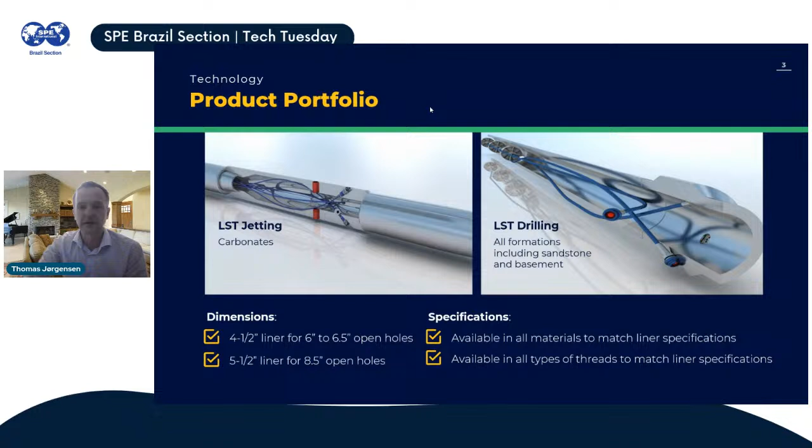So I will run an animation now on the jetting technology to go more into detail on that. I don't think there's time to also do a drilling animation that's available online, but the end result is very much the same with laterals extending out from the subs. So then moving to the jetting animation, I'll get this going.

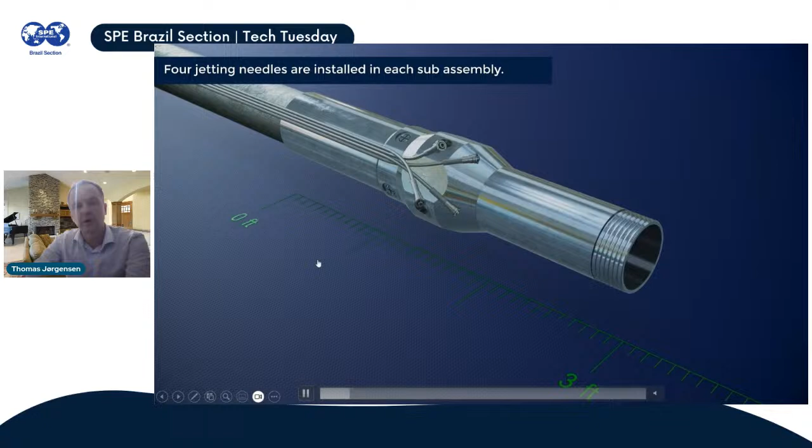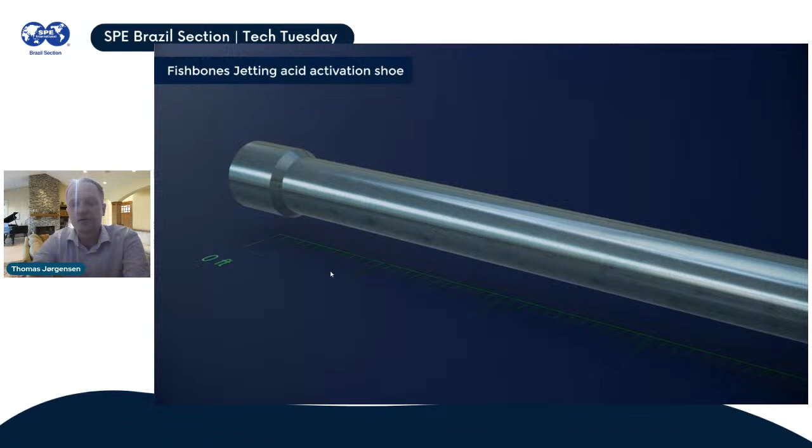This shows the sub, which is about 1 meter long, and is made up to a full-length liner joint in a workshop. Then 4 needles are installed into this assembly. Then there's an open hole anchor that will go with the string to anchor the liner in place. And there's an activation shoe that's required. This enables circulation as we run in hole, and it's closed when we start pumping acid.

So this liner is run into the hole. Multiple stimulation subs can be run depending on the length of the open hole. There's an open hole anchor being run, and then there are additional subs coming. The liner is then run to TD. The liner hanger is set. The top hanger is set.

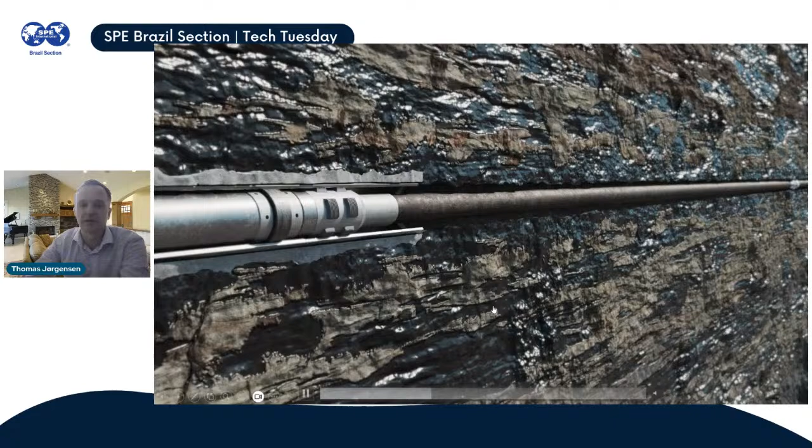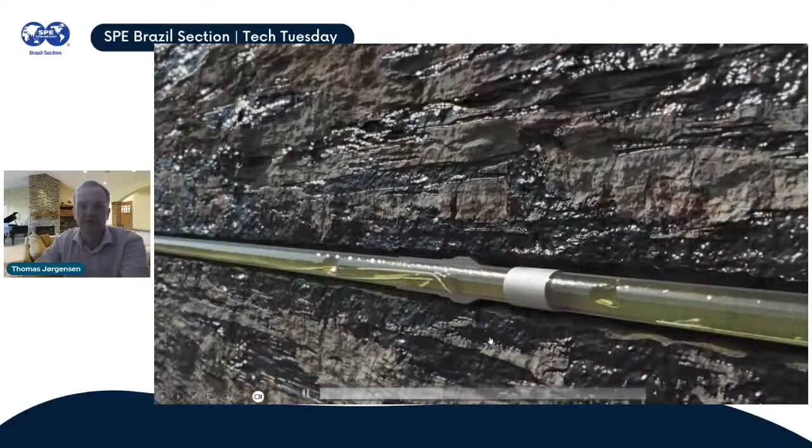And we start pumping acid into the liner. Now the shoe is open, so it's possible to get the acid all the way down to the shoe, and the shoe will close upon contact with acid. There are flapper valves that will close. And now we have a closed system, and sorry, I just have to get this in the right order. Now we have a closed system and can continue to pressure up.

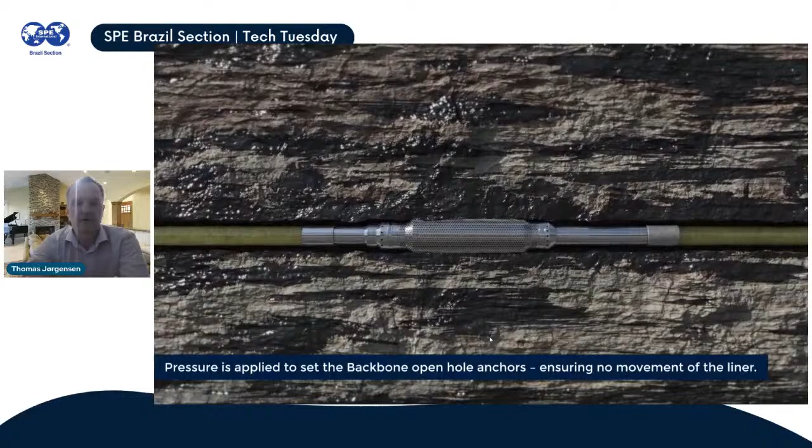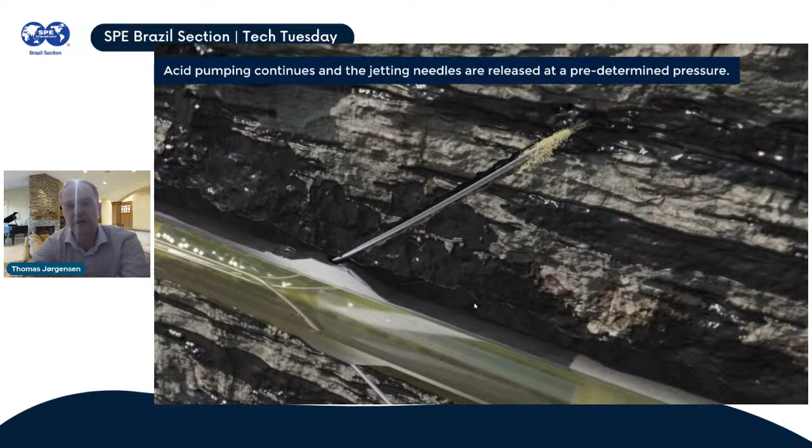The open hole anchors will expand and anchor the liner, and the needles will activate. So now the needles are activated in a process of dissolution of the carbonate formation and erosion of the formation. So basically the needles make their own hole as they progress forward, up to 10 meters away from the wellbore. All the needles activate simultaneously. This is a typical operation that takes 3 to 5 hours to complete the extension of the needles.

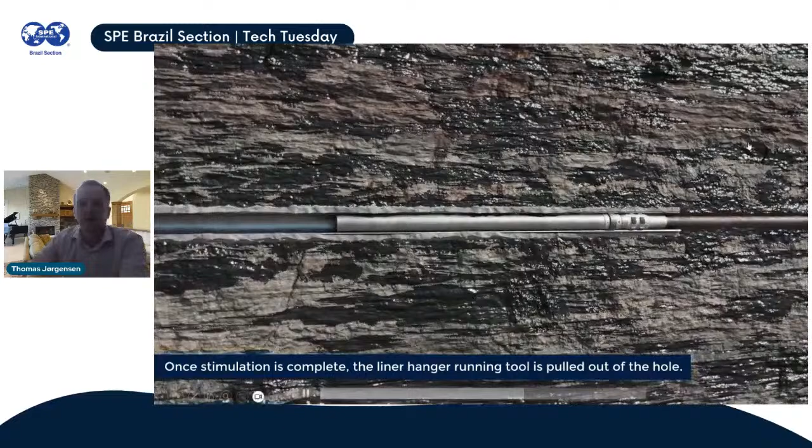After the needles have been extended, the running tool is pulled out of the hole. Then an optional tool can be run. It's a junk basket with a cutter head to cut and remove any remaining needle tails from the liner ID. This is to make it possible to do an intervention or run PLT later. So this tool cuts and collects the remaining needle tails, bringing them back to surface.

An alternative method is to run a flat bottom mill and just push all the remaining needle tails to the bottom, which can be a bit more effective way of doing this operation. Then the well is put in production. The hydrocarbons will flow in the annulus between the needles and the formation. The jetting creates a hole that is larger than the needle itself, so there's room for fluids to flow down into the main bore and then through production valves in the subs.

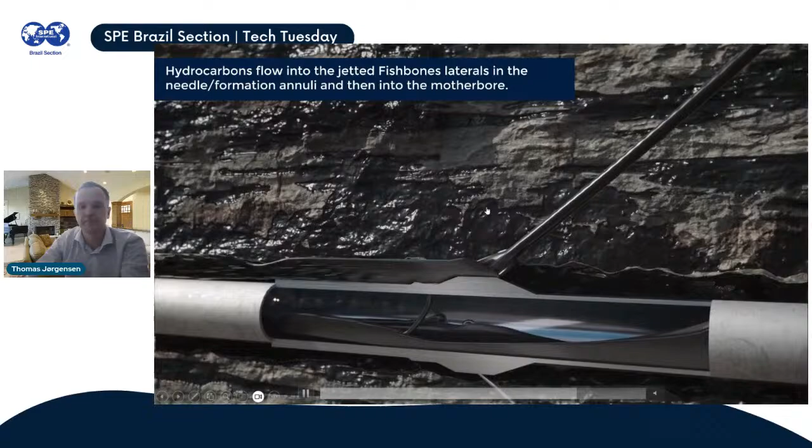So this technology makes it possible to connect layers, to connect to fractures, and to get that acid mechanically diverted and uniformly distributed between the needles, with the objective of increasing productivity or injectivity in case of water injectors.

This slide shows a couple of photos of the drilling technology. You can see the sub there to the right, made up to liner joints. The front sub shows a needle sticking out, and you can see the drill bit there in the front. This is a 1/2-inch drill bit sticking out there. This piece will be pushed down against the seal and secured in place before we run in hole. To the left, you can see the needles being assembled and pushed into the made-up subs and prepared. This is all done in a workshop, and then the ready assemblies are shipped to the rig site.

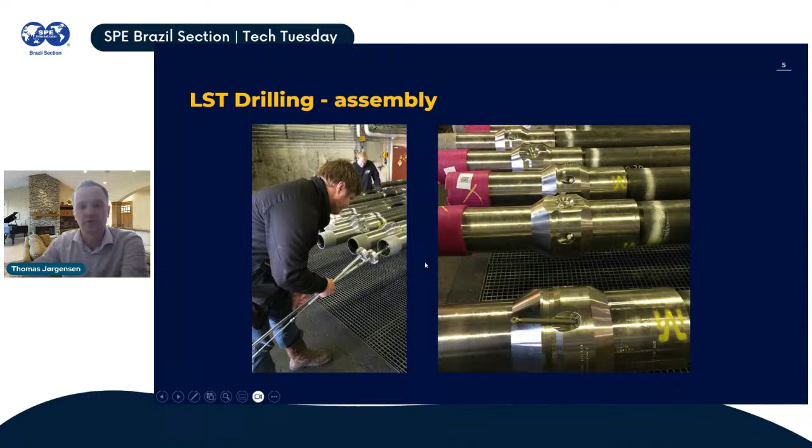So on the rig, the tools will look like this. To the left here on the pipe deck, you can see the stimulation subs wrapped up in protective material in white on the top there, and we have the full length liner joints and all the needles inside. In the picture to the right, you can see one of the subs going into the hole.

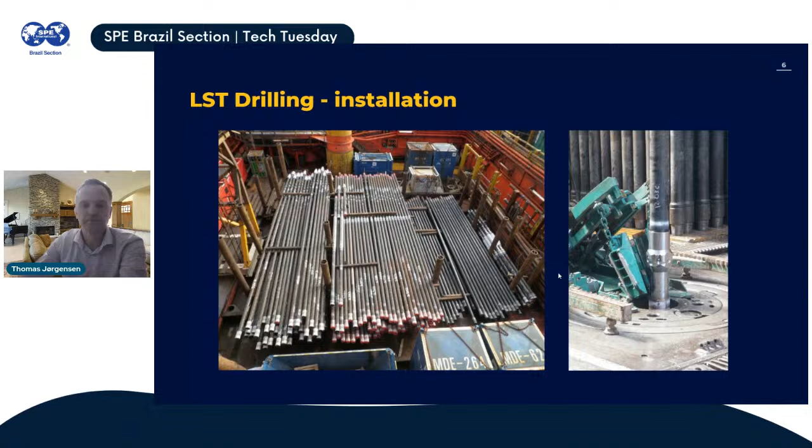It's also possible to combine the subs with standalone screens in case of need for sand control. This solution has been run in a number of wells in the North Sea, where instead of placing the sub on a blank joint, it's mounted onto a screen. In that case there are no production valves in the sub, but all the inflow will go to the screen, which has to have a non-perforated base pipe and an ICD with a check valve. So the inflow will be to the ICD, and the check valve is required to hold pressure as we are circulating to drill out the needles.

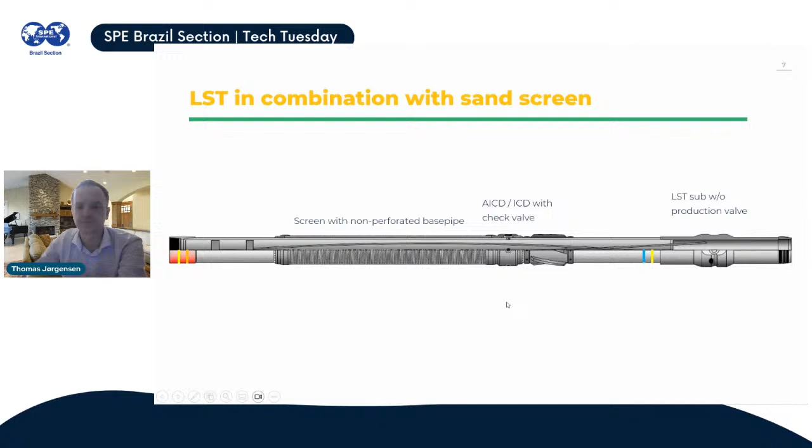This slide shows some core samples, some formation samples. We do testing up front on representative formation samples to make sure that the formation can be penetrated either with jetting or drilling, and the testing also gives good information on the time, the ROP basically, to extend the needles. From this testing done up front, we can calculate the volume of acid needed to extend the needles, or the time required to circulate to drill out the needles. To the left here, you can see a limestone formation that has been jetted, and you can see the hole there. To the right, there are some sandstone samples.

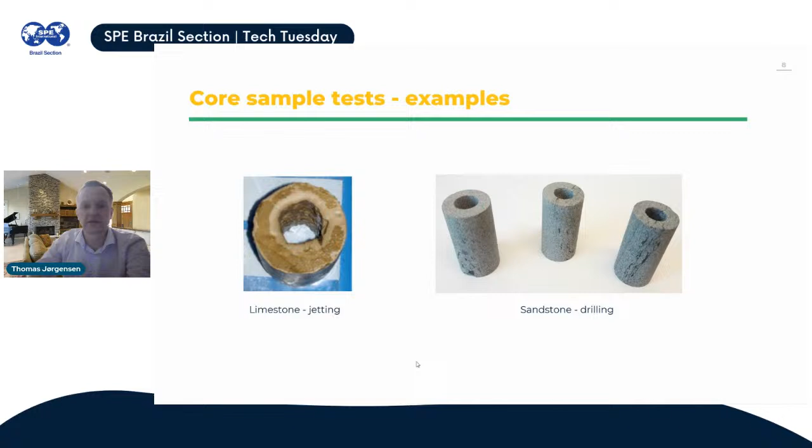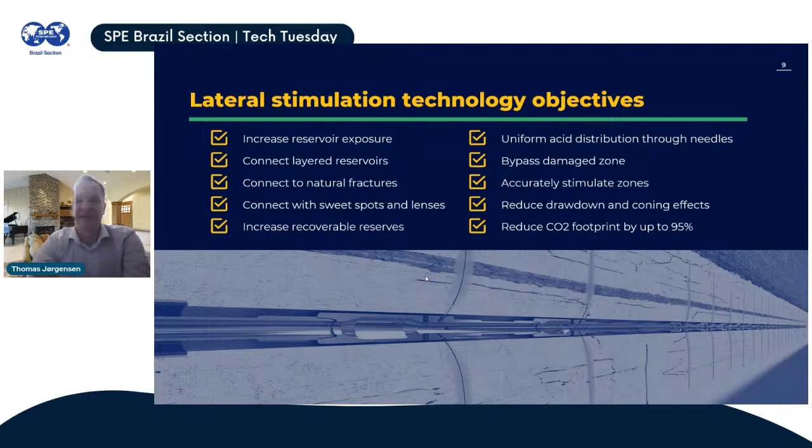These are some of the main objectives of deploying lateral stimulation technology. It's about creating more exposure to the reservoir, connecting layered formations, and connecting to natural fractures away from the wellbore. It's also possible to connect to any sweet spots and lenses that could have been missed during geosteering with this technology.

In terms of the jetting technology, the acid will be uniformly distributed between the needles, as there is a jet nozzle with a small, very restricted ID in the tip. So the acid will distribute between the needles, and you can be sure that the acid will be distributed into that formation 10 meters away. Given the length of the needles, this certainly bypasses the damage zone and provides an accurate type of stimulation. It's fully controlled - in case of a thin formation, it's possible to reduce the length of the needles to ensure they stay within the target formation.

Another benefit of lateral stimulation, or any type of stimulation, is that it's possible to produce the well with a lower drawdown, which results in less coning. I will show an example of that in one of the case histories coming up soon.

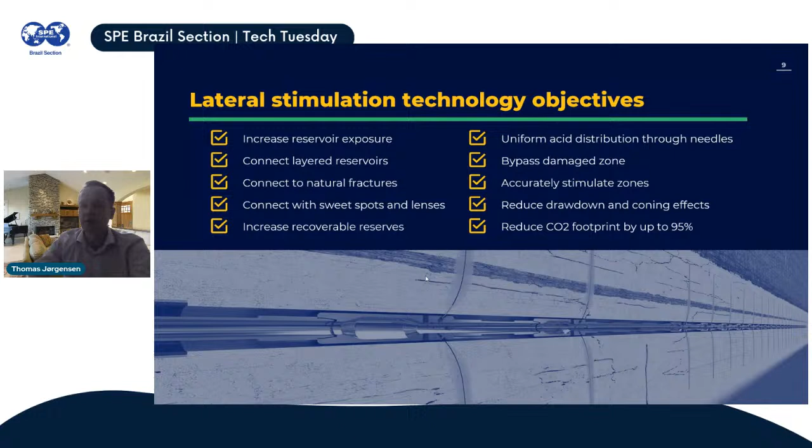It's also possible to reduce the CO2 footprint. A study was done by a third party in Norway a couple of years ago that looked at a standard North Sea well, like a 1,000-meter horizontal well, and calculated the CO2 emissions from hydraulic fracturing operations versus a lateral stimulation operation. That concluded it's possible to reduce CO2 emissions from the stimulation operation by 95% using the lateral stimulation technology. Main reasons for that are reduced rig time and the elimination of the stimulation vessel.

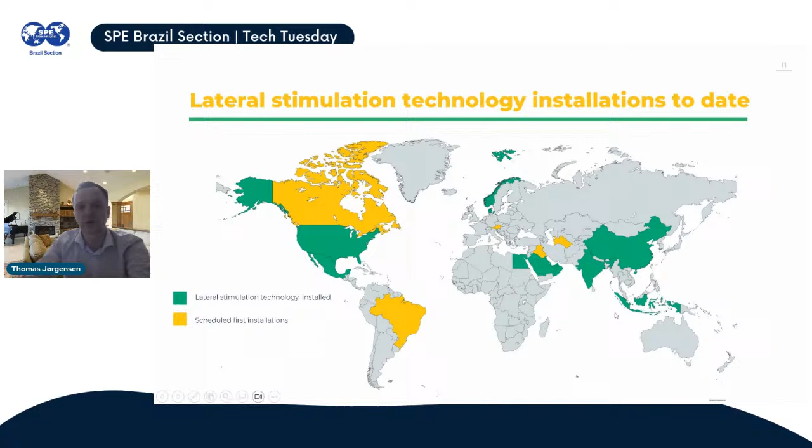Those carbonates, naturally fractured and layered carbonates, are very good candidates for this type of technology. Then you have India, with deployments in carbonates offshore, and China, with sandstone onshore and basement formation offshore, and also one deployment of the technology in Indonesia. There are some countries coming up - as Pierre mentioned, we are preparing for first deployment in Brazil, and a few other countries are colored in yellow with upcoming installations.

As mentioned in the beginning, this technology is applicable in a whole range of applications. This is a summary of what has been done to date: naturally fractured carbonates, layered carbonates, deployments in chalk formations with the drilling technology, deployments in layered sandstone and fractured basement, and also in conglomerate formation. There is also one deployment of the jetting technology in coal bed methane.

In terms of well types, it's really applicable in any kind of well. To date, there are deployments in oil and gas producers, water injectors, exploration, and appraisal wells. To the right, you can see a combination with other well construction technologies that has been performed to date.

As of today, there are 44 installations of this technology globally. Installation number 45 is ongoing, and it will be a busy year in 2024 for our operations team, with multiple installations in the planning. Both onshore and offshore wells, the split is almost 50-50.

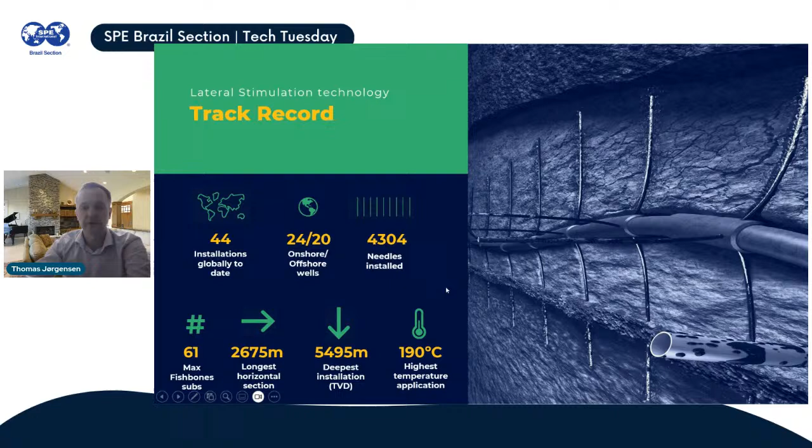In terms of biggest job, 61 subs, that's a deployment in the North Sea in a 2,600 meter horizontal wellbore. Deepest deployment, 5,500 meters, and that's also the warmest application, 190 degrees C. This does not represent the limits, but the actual installations so far.

Then I have selected a number of case histories to give an idea of various applications and the type of results that have been achieved with the lateral stimulation technology.

Starting with a typical Middle East carbonate application: low permeability limestone, less than 1 millidarcy horizontal permeability, with some denser layers with even lower permeabilities and quite poor vertical permeability. These wells are typically matrix stimulated on coil tubing. The operator wanted to test the lateral stimulation technology to see if better results could be achieved.

This specific installation took place in a new well with a 1,500 meter horizontal wellbore, 6-inch open hole. A 4.5-inch system was deployed with 40 jetting subs evenly spaced out, and since there are 4 needles per sub, 160 needles or laterals were made.

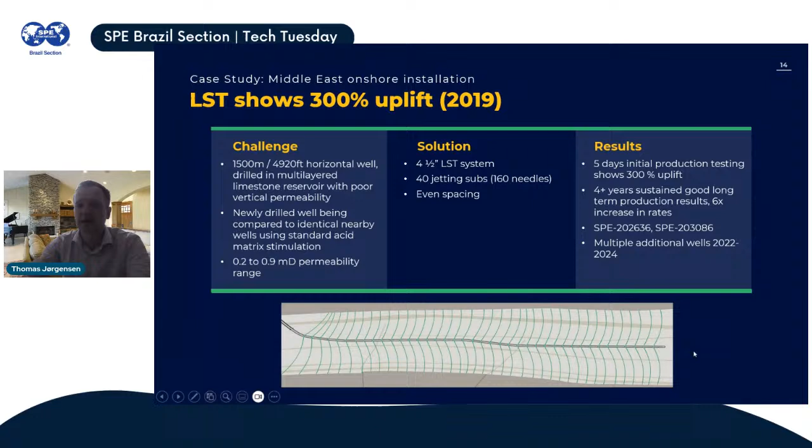In terms of results, the initial production testing showed a 300% uplift compared to offset wells, and the long-term production has been really good. There are 2 SPE papers written and published by the operator, and this slide is from one of the SPE paper presentations.

To the left in this image, you can see the 3 wells: the one in the middle with the lateral stimulation technology, and 2 offset wells that were matrix stimulated. In the chart to the left, there is a comparison between the lateral stimulation completed well, producing 1,600 barrels per day, and the 2 offset wells, which were at 500 or even less barrels per day. To the right, you can see the PI difference.

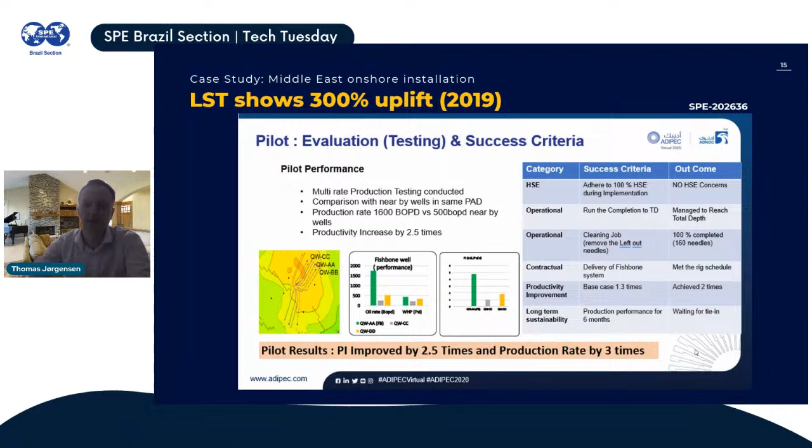Moving to another Middle East installation, this is offshore in a multi-layered naturally fractured limestone formation. This well was targeting 3 layers called D1, D3, and D4. Layer D1 has quite good properties, and no stimulation was performed there, while in the lower 2 layers stimulation was needed. The operator evaluated different stimulation methods and decided on the lateral stimulation technology.

The permeability in the lower 2 layers is quite low, like 0.2, 0.3 millidarcy. 20 jetting subs were deployed across the lower 2 layers, and the jetting operation was completed. The well was put on production at a much higher rate than expected.

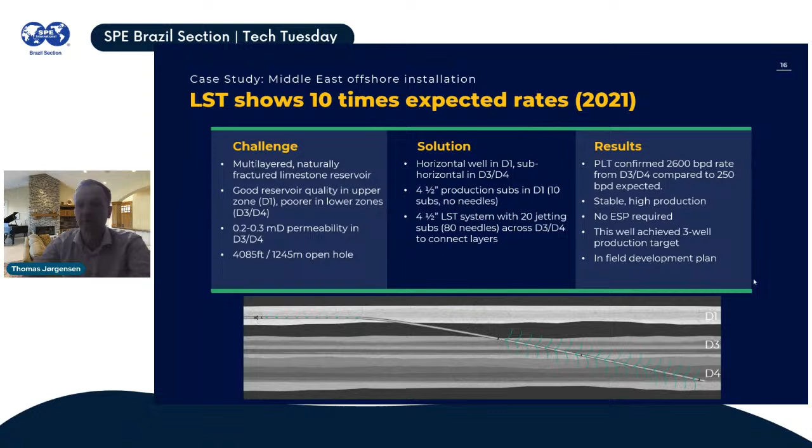So the operator decided to run a PLT to confirm where the production was coming from, and that PLT confirmed that the majority of the production was coming from the lower two sections, at a 10 times higher than expected rate. This well achieved a 3-well production plan, and no ESP was required as planned in this well. So a good installation of this technology offshore Middle East.

Another one from the Middle East, this is onshore, an example where lateral stimulation technology makes it possible to produce a well at a lower drawdown to avoid coning. This was an existing well that suffered from high GOR, since the operator had to produce the well at a very high drawdown given this very tight formation.

So stimulation was needed. Lateral stimulation technology was deployed. A 4.5-inch liner with 40 subs were run with 2 different needle lengths to avoid stimulating into the lower zone. The well was put on production with a 4.5 times increase in PI, which allowed the operator to reduce the drawdown and also reduce the GOR.

So the objectives of these installations were met.

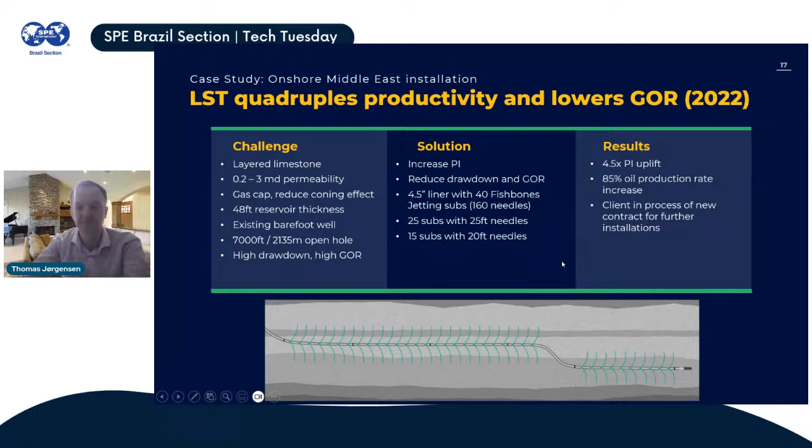Moving from the Middle East to Asia, this well is an appraisal well, the final appraisal well in this offshore limestone formation drilled in 2022. The previous appraisal wells were stimulated in a bullheading operation, matrix stimulation, and they didn't really achieve the results they were after. They were targeting 600 barrels per day from these appraisal wells.

So it was decided to run the lateral stimulation technology in the final appraisal well. A quite small system with only 6 subs were run across the target lower layers. The deployment was executed, the pumping was done, and the well was production tested. It started to flow more than 2,000 barrels per day, and sustained at 1,800 barrels per day during the production testing. So the production target was met, and the operator is proceeding with the field development plans.

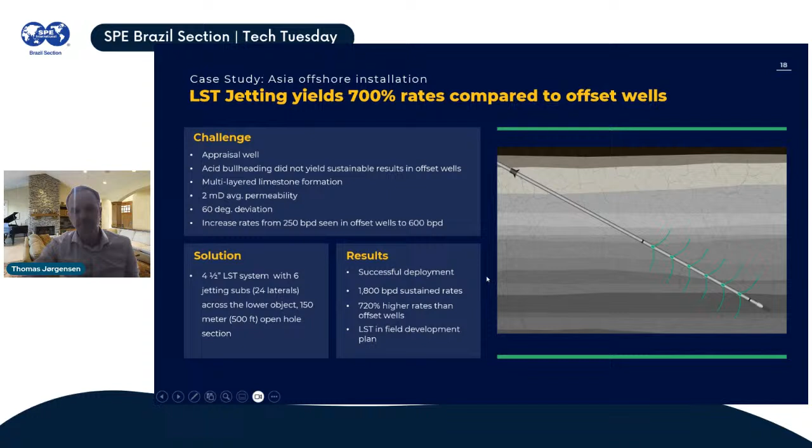Then we're moving to Mexico. This is another offshore limestone application where wells typically are matrix stimulated in a bullhead operation.

A 4.5-inch system was deployed. 26 jetting subs were run, making 104 laterals.

The well was put on production, rates pretty much in line with expectations, and the long term results have been that this well is sustaining rates in a much better way than the offset wells. So this well, as far as we know now, is the best performing in the field, and also producing at a lower water cut.

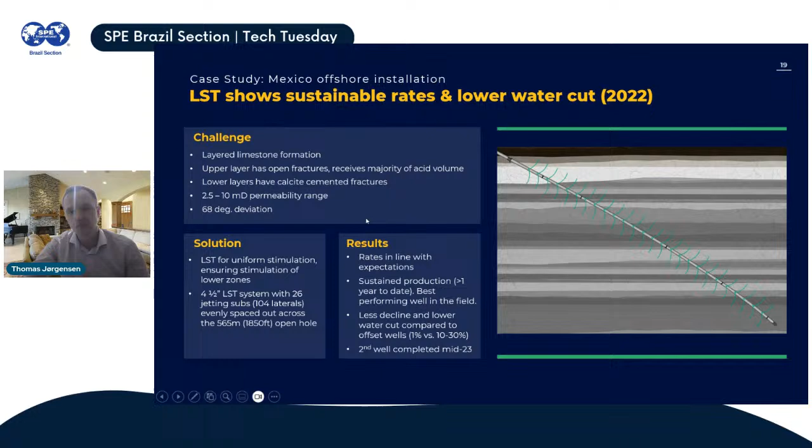One more limestone application from the Middle East. I wanted to show an example where a PLT was run, with a bit higher permeability than the other ones I've shown. This is an offshore limestone again, with a 900 meter open hole section and a system with 10 jetting subs.

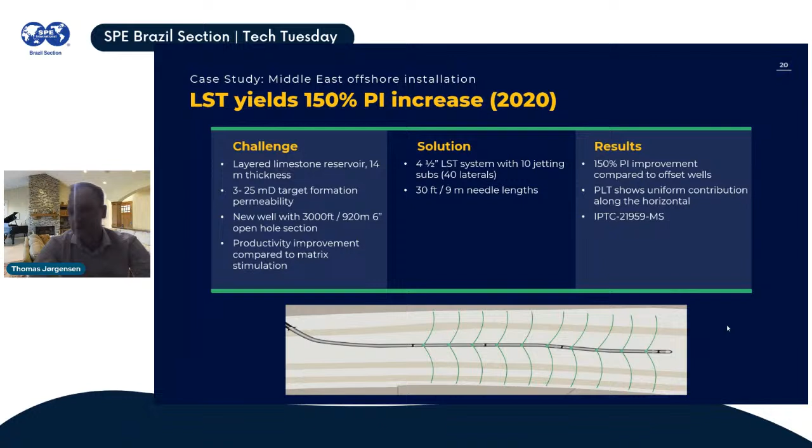This was installed in order to improve productivity compared to matrix stimulation. The installation was executed, acid was pumped, and the well was put on production at a 150% increase in PI. The PLT showed a uniform influx throughout the horizontal, and there's an IPTC paper written on this case.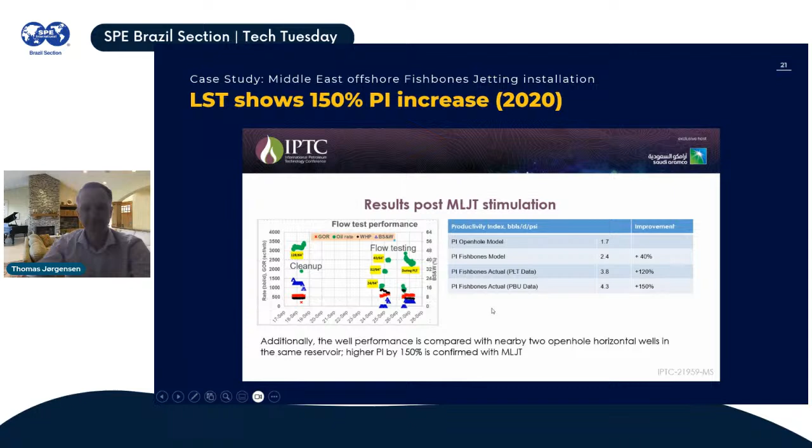Another limestone installation. This is one of the tighter formations this technology has been installed in, a 0.1 millidarcy formation, layered heterogeneous formation onshore North Africa. Previous and offset wells had been hydraulically fractured, and one of the challenges here is that the lower formation is water saturated.

As I mentioned, formation testing on core samples is done as part of the planning. That was also done in this case, and formation samples from the lower zone below were provided, and it was confirmed that jetting would not happen. That formation was too dense for the laterals to be made.

So in this case, we could be sure to not stimulate into that water saturated formation. In terms of results, this well achieved 150% of the expected rates without any water.

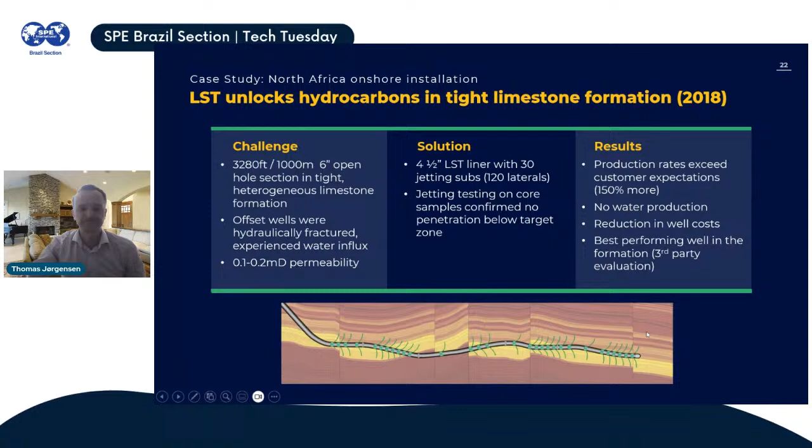So those were the jetting examples. I have selected two case histories for the drilling technology as well, starting with a sandstone application in the Norwegian Sea.

Targeting a low perm and layered 30-meter thick sandstone formation, which has some impermeable stringers. The objective of the lateral stimulation technology was to penetrate those impermeable stringers to be able to drain from the whole sand reservoir.

This well, let me go to the next slide, is a dual lateral well, with the lateral stimulation technology deployed in the main bore. That open hole section is 2,000 meters long. A lateral was also drilled, 2,000 meters long, at the same TVD, same sand. From the logging, the operator expected the contribution from these two boreholes to be the same.

The lateral was completed with a pre-drilled liner, so no stimulation was deployed there. Going back to this slide, this schematic shows the completion in the main bore with the lateral stimulation technology.

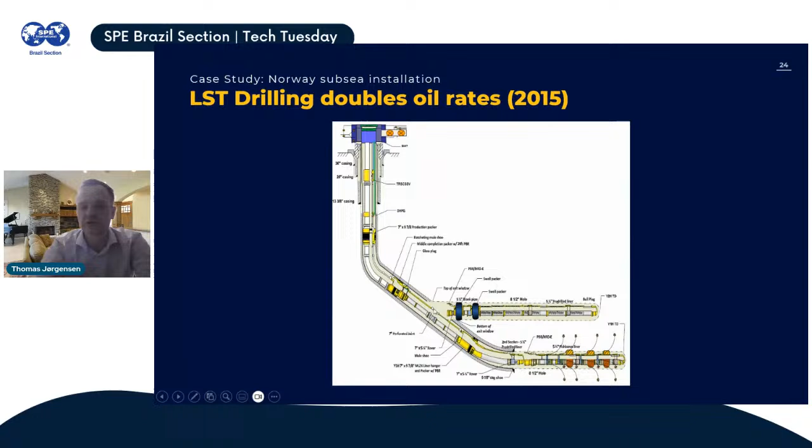The well came online end of 2015. After 2 years, Equinor, the operator, ran a production log below the junction to measure the contribution from each of the branches. That PLT concluded that two thirds was coming from the main bore with the lateral stimulation technology, and one third from the lateral. So 100% higher production from the main bore with the lateral stimulation technology.

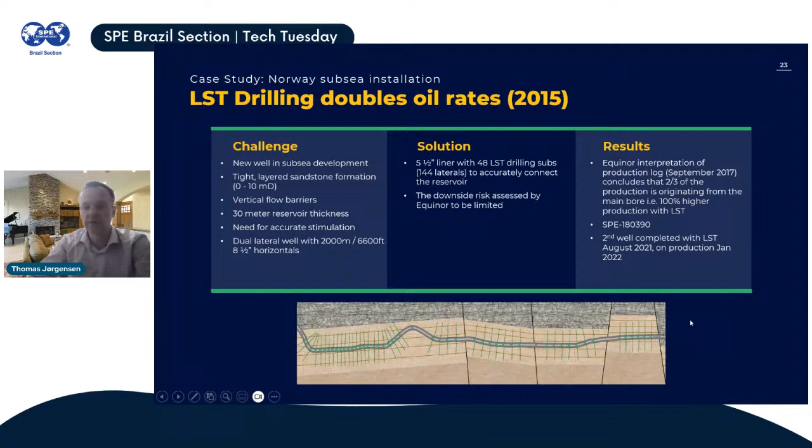One more well has been installed in this small field development, which now has 2 production wells, and both of these wells are still producing.

The final case history is also from Norway. This is from a field in the North Sea, a bit further to the south, offshore Norway, where lateral stimulation technology was deployed in 2 wells in an infill well campaign in 2021 in the Edvard Grieg field, which has a conventional sandstone reservoir on top.

But below there is a fractured and layered conglomerate formation, and this conglomerate was the target for this infill well campaign.

This conglomerate has an unconsolidated sandstone with rocks embedded. Those rocks are of granite, really hard to drill. So a special drill bit design was developed together with the operator for this application.

Given the unconsolidated sand, there was a need for sand control. So the lateral stimulation technology was combined with standalone screens and ICDs with check valves in these completions. There were some faults that led to losses, which were isolated with swell packers on the completion string.

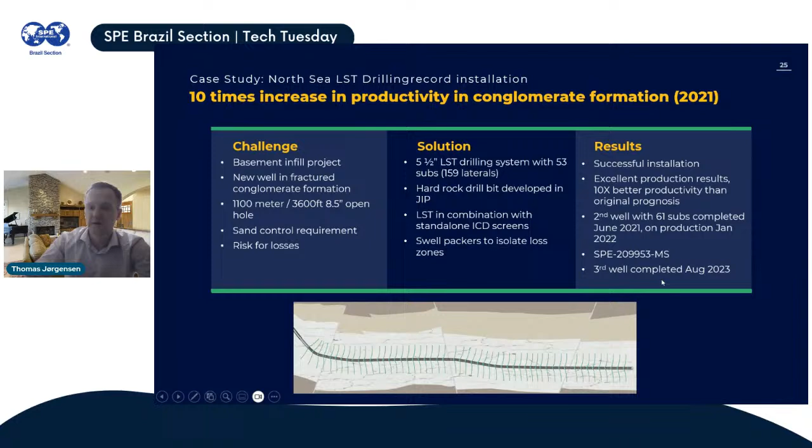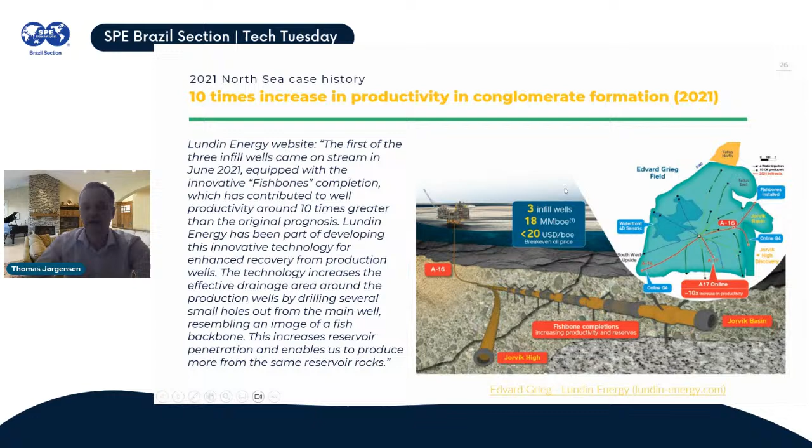Following the first well coming on stream, the operator, which was Lundin Energy at the time, has since been taken over by Aker BP. They made this announcement on their website, so this is basically a copy paste from that website, presenting the project targeting the conglomerate formation, and with the installation of the lateral stimulation technologies and the results. A few months after, the operator announced that based on the results from this infill well campaign, they were able to increase the recoverable reserves in the Edvard Grieg field by 17%.

So that concludes my presentation, and I'm happy to move over to the Q&A session.

Fantastic. Thomas, thank you for the presentation, and I'm sure the audience will have some questions. I certainly have some. Sergio, I don't know if you have any, but it's the second time I see your presentation, Thomas, and I have new questions after that. So would you mind if I can start?

Would you mind retracing for attendees the flow path of the fluid, and what happens to it through the needles, etc., potential returns. And there was one question from the audience about the typical OD of the needles themselves, which are made of titanium. You might want to mention that again. Yeah, so the flow path is in the annulus between the drilled or jetted needle, so there's an annulus outside the needle to flow back into the main bore. Maybe I can bring up the very first slide, and hopefully you can still see the screen, right?